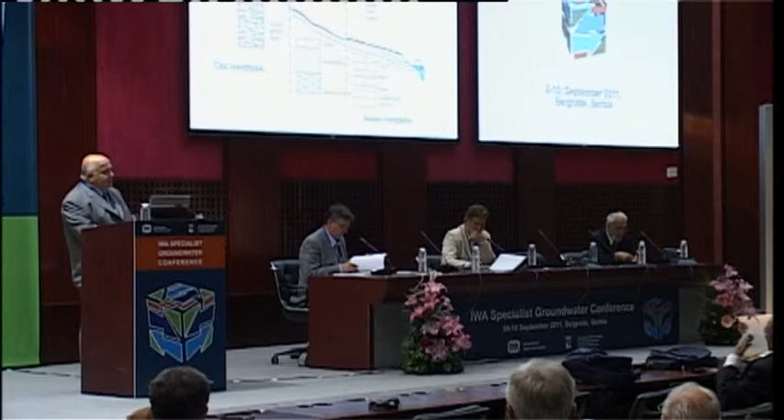The very important habit is the self-purification ability of alluvial groundwaters, which leads at the end to the baseline quality of the groundwater — very important today when we talk about protection and micropollution. In that way, the state of oxicity of aquifers is very important, because it influences a lot of very important processes and the status of groundwater.

The level of oxicity in an alluvial aquifer depends on the oxygen saturation of the river water, the oxidation and reduction processes of organic and inorganic matter, and the degree of oxygen restoration in the aquifer.

This definition is added a little bit more, regarding inorganic consumption of oxygen, and it is important because mineral consumption is one of the things which is not very well explored or investigated up to now, and it is in front of us to do that better.

Here we can see one longitudinal section of the aquifer from the source to the sea, and we see that at the upstream part of the aquifer we have coarse gravel and sand, in the middle less coarse, more fine, and in the lower river course we have very fine sediments.

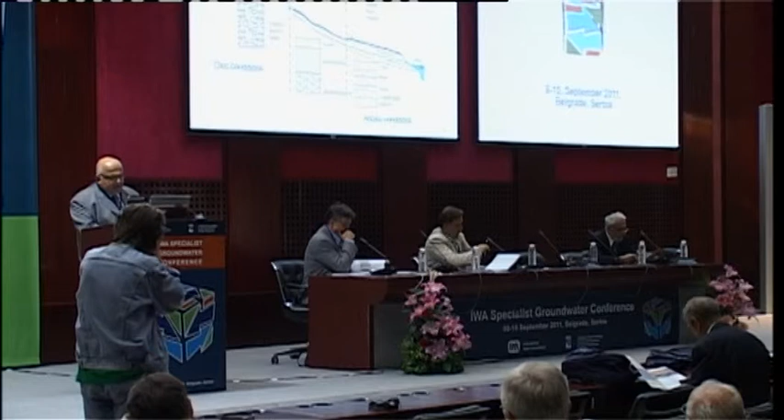Therefore, we have minerals which use oxygen too much in the lower part. So in the upper part of the aquifer, quite often we have an oxic state in the aquifer.

And in the lower part of the river course we have an anoxic situation. For instance, in the Danube, we have very good wells. For instance, in Germany, in Regensburg, Professor Brauch knows of the well there, about 300 liters per second, without clogging, very good for maintaining.

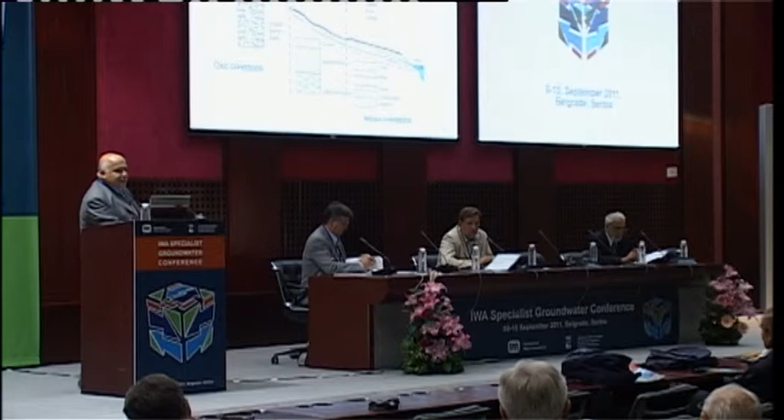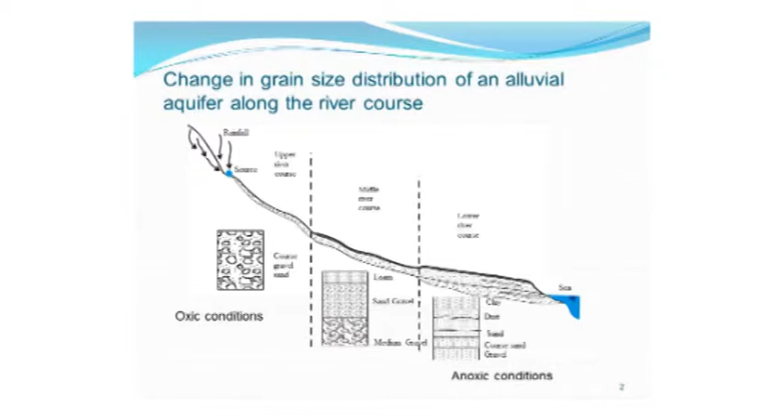Also in Bratislava we have even better wells, but when we go down to Novi Sad, for instance, we have several radial wells with about 70 liters per second, no more than that. In Belgrade, where is the confluence of the River Sava to the Danube, the average for one radial well is about 40 liters per second. The reason is the tiny particles which bring with them divalent iron and problems with oxygen content in the water.

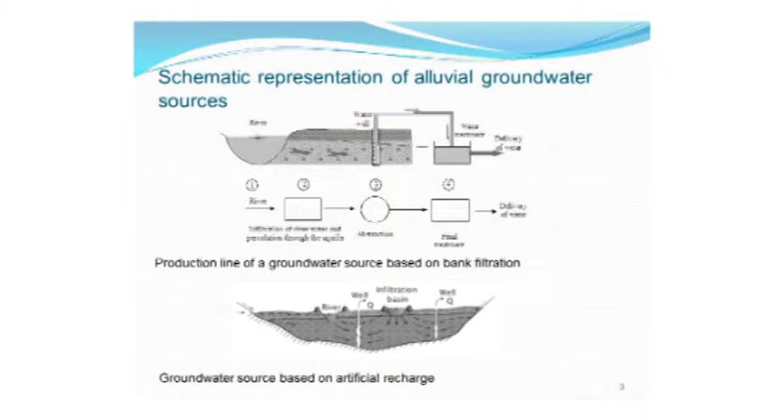Here we have a schematic representation of alluvial groundwater sources. One is bank filtration, the other is groundwater recharge. There are several very important points. First, the river — how to preserve good quality of the rivers. Second, filtration through the bottom sediments, and also filtration through the aquifer.

The third is well abstraction of water by well. It is important because there appears clogging, especially due to aerobicity of an aquifer. At the end, water treatment and delivery of water.

Similar, but not the same, is with artificial recharge — I will not talk about that now. And the third situation is a small alluvial source at some distance from the river.

Here the main thing is to have a protection zone, and after that to have enough self-purification room to reach baseline quality of the water. If necessary, treatment; if not necessary, just disinfection.

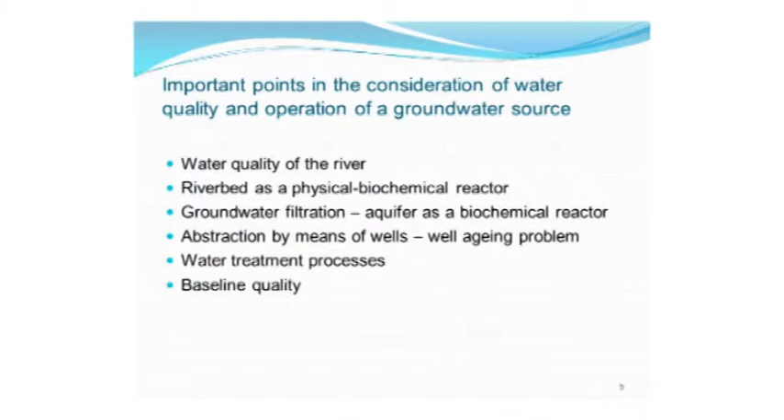Conditions and processes are substantially affected by the degree of oxicity and baseline quality of the water — very, very important. We do know that baseline quality for groundwater varies very much. We have some waters with a lot of organic matter, some waters very fine, possible to drink directly. The second is groundwater self-purification processes, as I mentioned, and the third is well aging processes. We will hear something about all three points.

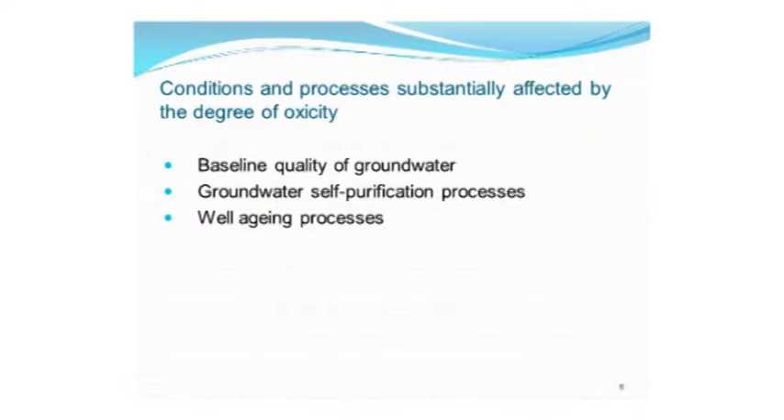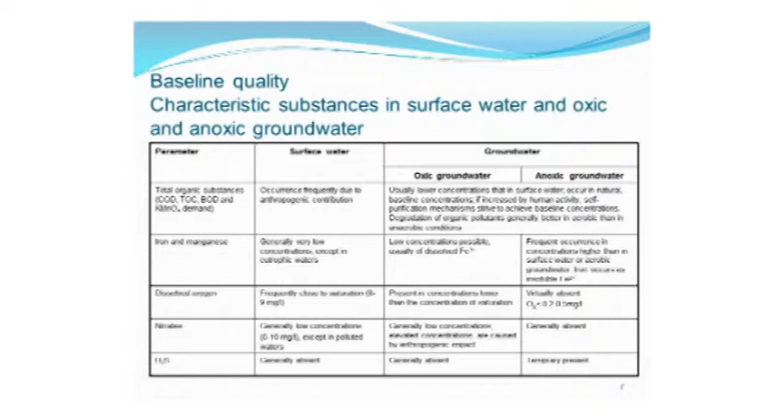Oxygen saturation is about 8 to 9, something like that, and in oxic groundwater it almost never reaches that saturation, but could be several milligrams per liter. The limit between oxic and anoxic could be something like 0.2 to 0.5. First, we have to define what is anoxic groundwater.

We can talk about anoxic bacteria, which use the oxygen from the salts.

Nitrates in oxic groundwater can be huge, also due to pollution. In anoxic groundwater, no nitrates, and hydrogen sulfide also different for these two cases.

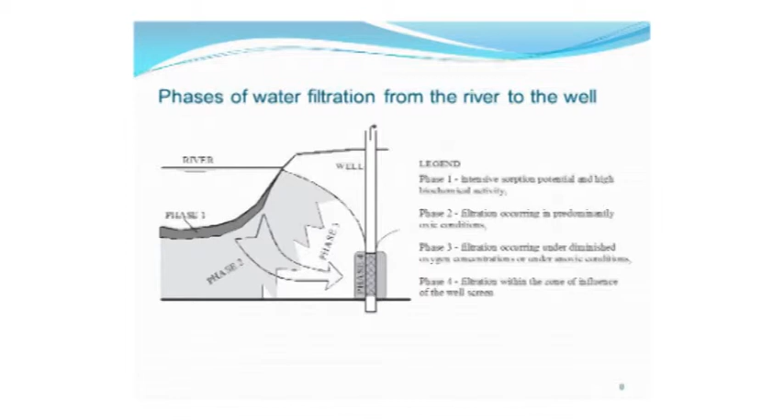Phase 2, filtration occurring in predominantly oxic conditions and using oxygen, and coming into phase 3, anoxic or low oxic conditions, filtration occurring under diminished oxygen concentrations or under anoxic conditions. And phase 4, filtration within the zone of influence of the well screen.

In anoxic conditions, especially in slightly anoxic conditions, we have clogging of the well, very often caused by trivalent iron, which comes from two-valent iron by biochemical reactions.

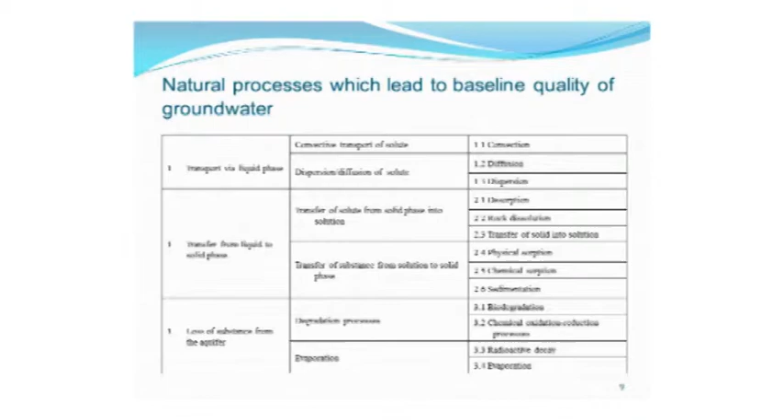Natural processes which lead to baseline quality - we have three main points: transport via liquid phase, convective transport and dispersion; diffusion, transport from liquid to solid phase, transfer from solid to solution and vice versa from solution to solid; and loss of substance from the aquifer through degradation process, evaporation, and some other processes.

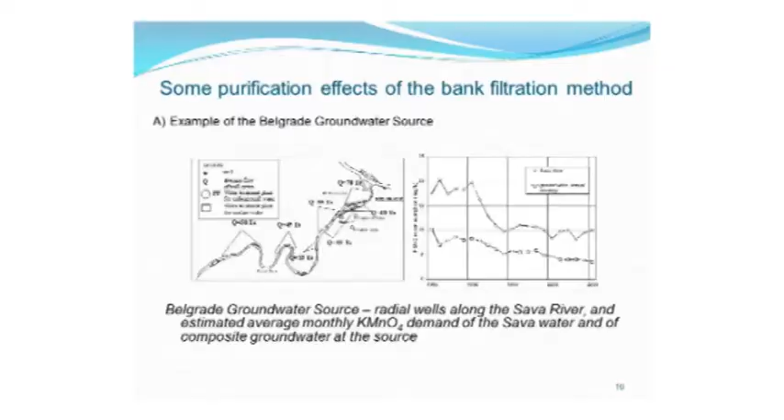You can see the difference, and that means that organic carbon from river water is diminished several times before it becomes groundwater and is treated in the water treatment plant of Belgrade Waterworks.

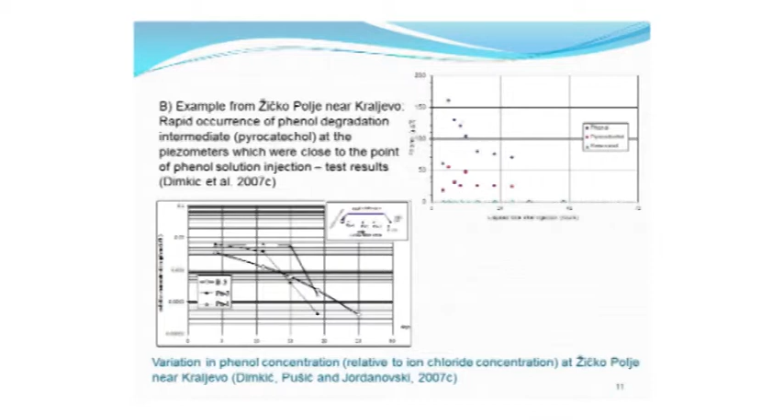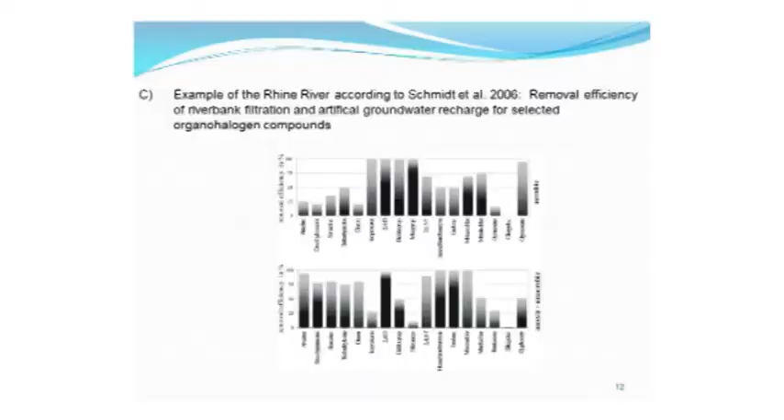Also Germans, Schmidt and Professor Brauch, similar to Belgrade Waterworks - here we have bank filtration for the Rhine river, and the conclusion is similar to Belgrade.

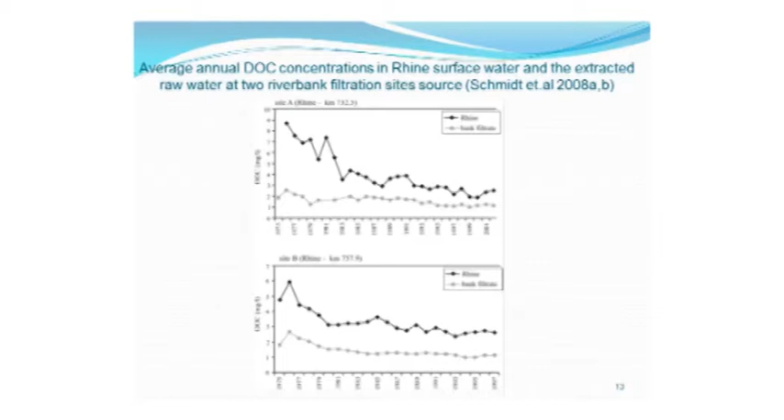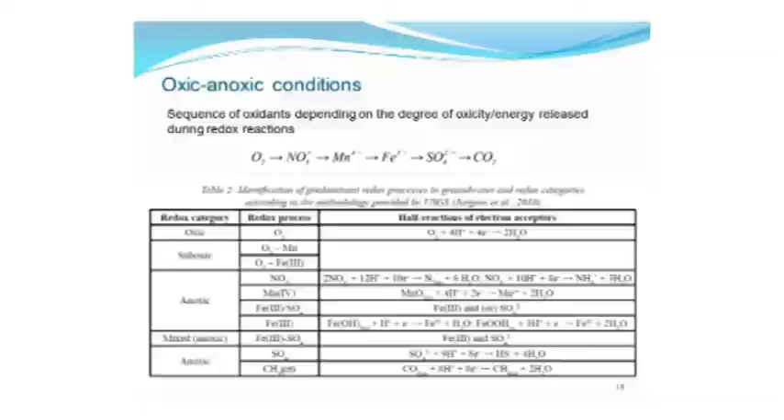In oxic-anoxic conditions, we have a sequence of oxidants depending on the degree of oxicity. The strongest is oxygen, and it makes oxidation of the other metals in oxic conditions, and after that nitrates, manganese, iron, sulfates, and at the end methanogenesis, through different pathways.

This table is by Jürgens et al., 2010.

Status in which certain significant substances are found in the groundwater: oxic NO3 to anoxic ammonia; oxic 3-valent iron to anoxic 2-valent; manganese 4 valence to anoxic 2; sulfates to sulfides; and carbon dioxide to methane.

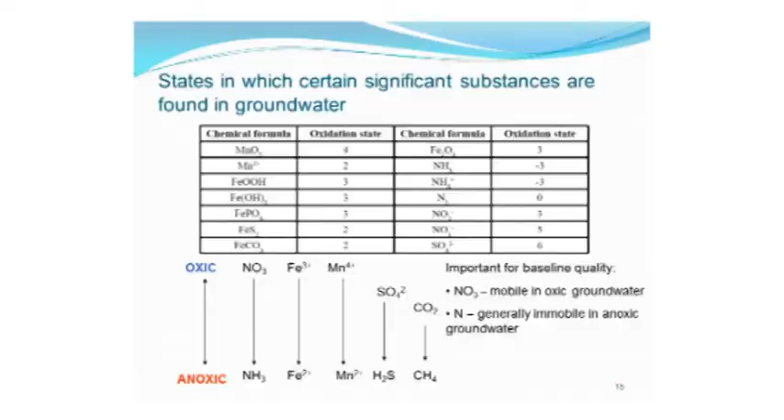Well aging caused by iron. Now we can see the well filter, and in the third phase of filtration, we have two-valent iron soluble in the water coming to the filter of the well.

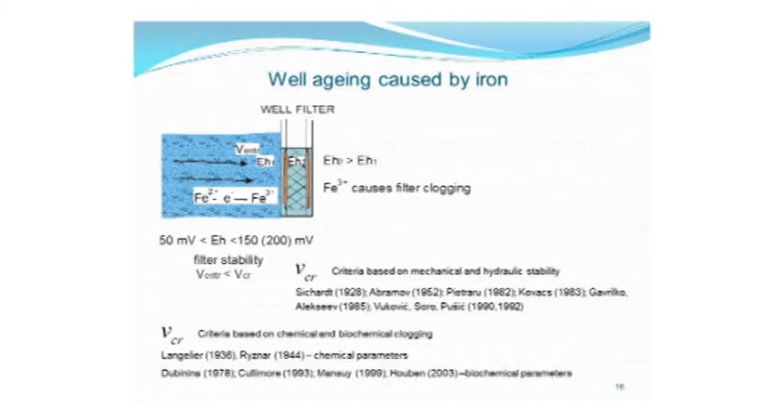It is supposed that the redox is different in the well, maybe a little bit more than in groundwater, and we have shifting of two-valent iron to three-valent iron through biochemical processes. This is a very important process which leads to a lot of economic losses for a number of water sources. For instance, for the Belgrade water source, each year we have a loss of about 200 liters per second of water because of the clogging.

This happens mostly in slightly anoxic conditions, for instance between 50 and 200 millivolts of redox. In the past, entrance criteria for the velocity of water into the well filter were established by Sichardt, very old, from 1928, and later by Abramov, Pietraru, Kovacs, Gavrilko, Alekseev, and our authors Vukovic, Soro, and Pušić.

But these did not take into account biochemical reactions. After that, many authors examined what happens with biochemical reactions - first chemically, Langelier and Ryznar, and after that Dubinina, Cullimore, Mansuy, and especially Houben who examined this. But they mostly examined chemical processes, not the relation between hydraulic resistivity in the well and chemical indicators and processes.

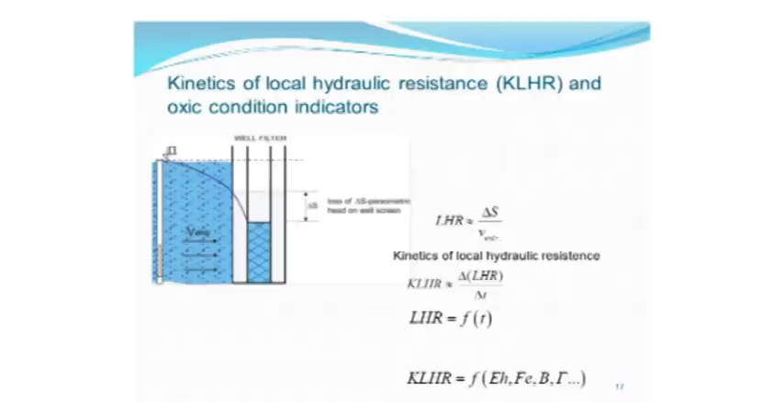So therefore we introduced a new parameter, local hydraulic resistance. We get it by dividing head loss by well entrance velocity, and the kinetic of local hydraulic resistivity, which means how local hydraulic resistivity changes over time. These factors are a function of redox conditions, content of iron, biological agents, and also the geometry of the aquifer, and some other parameters - but these 2-3 are most important.

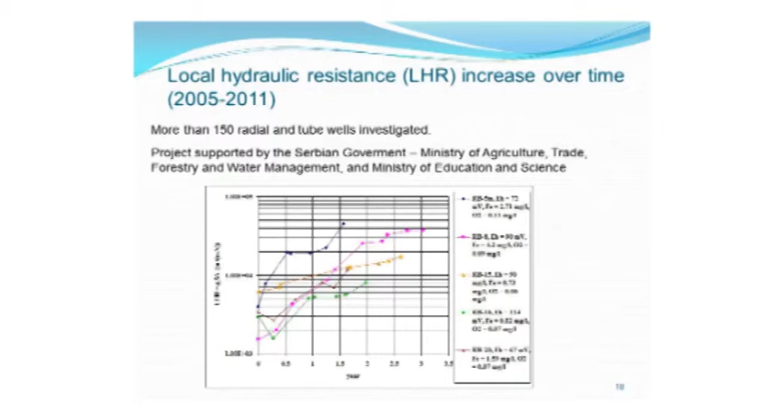We examined this on maybe 150 wells over more than 5 years, and we found a significant rise in local hydraulic resistivity. You can see a very characteristic diagram for 5 wells, which means that after some time you must either regenerate the well or drill a new one. So it's very important to know the permitted velocity for the filter entrance, and that's really quite a job to find out.

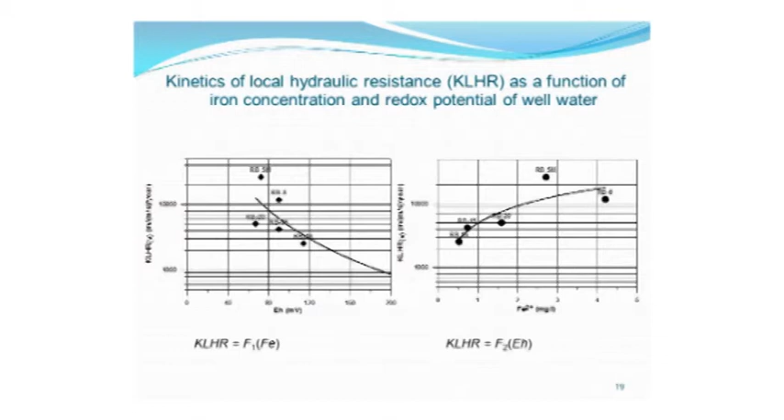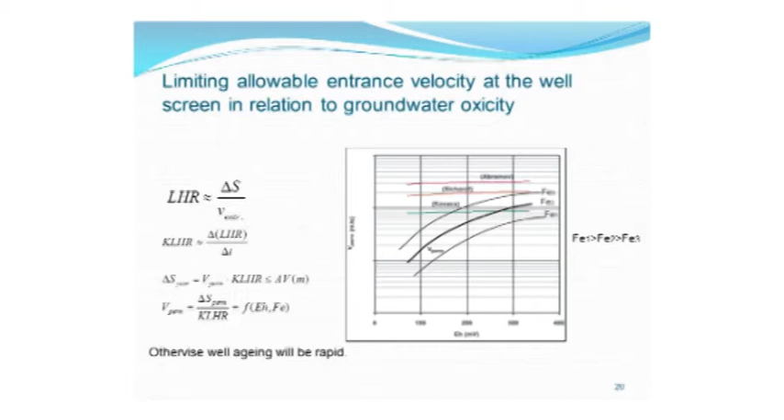This is very important, because you can see there is even a 10 times difference between the old design criteria and the actual criteria which should be used. It's a very important economic issue now, and one must think very carefully about this when designing a water source. Otherwise, he would pay much more.

And at the end, conclusions. Alluvial groundwater is extremely important. Oxic conditions occur more often in the upper part of the river basin than in the middle, or especially the lower part. Besides the degree of organic load, mineralogic consumption of oxygen is also important. In oxic conditions, oxidation takes place through oxygen dissolved in water.

In anoxic conditions, biochemical oxidation is based mainly on nitrates, compounds of ferric iron, tetravalent manganese, as well as sulfates. Fifth, various substances are often found in groundwater in different states of oxicity and element valencies depending on the degree of oxicity. The baseline chemical profile of groundwater quality depends on oxicity. Sixth, well aging due to screen clogging with iron deposits is a process of great economic significance.

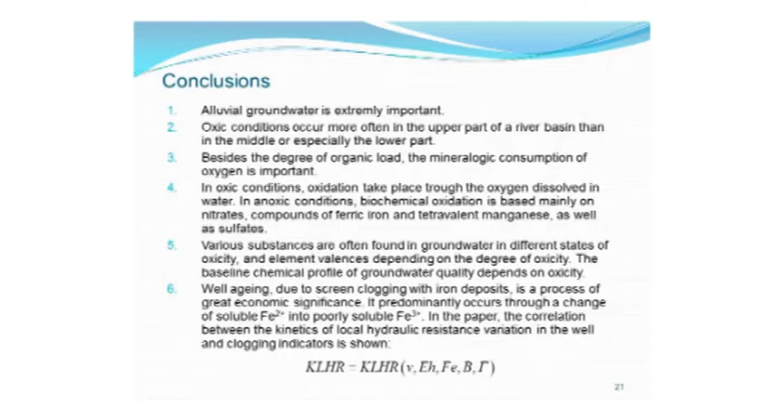It predominantly occurs through a change of soluble iron into poorly soluble trivalent iron. In the paper, the correlation between the kinetics of local hydraulic resistance variation in the well and clogging indicators is shown in that formula, which we mentioned. The area in which biochemical processes become dominant in relation to the aging of the well is basically the area of anoxic groundwater.

Redox less than 150, 200, something like that - not always quite proper, but about to be proper. Where there is high oxicity, standard criteria - filtration, stability, and laminar flow to the well - are the most significant criteria for the design of the well screen and its operation. That means that in a very high oxic state, there is no

microbiological processes or clogging. In the design of groundwater sources, protection zones, drainage facilities, and the like, it is important to properly address the oxic state of the groundwater. This can have a substantial technical and economic impact.

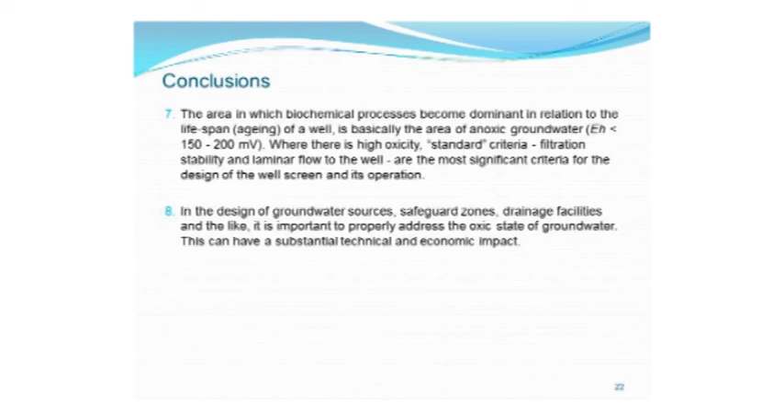And therefore, we have theme number 2, impact of oxicity on groundwaters. Thank you.